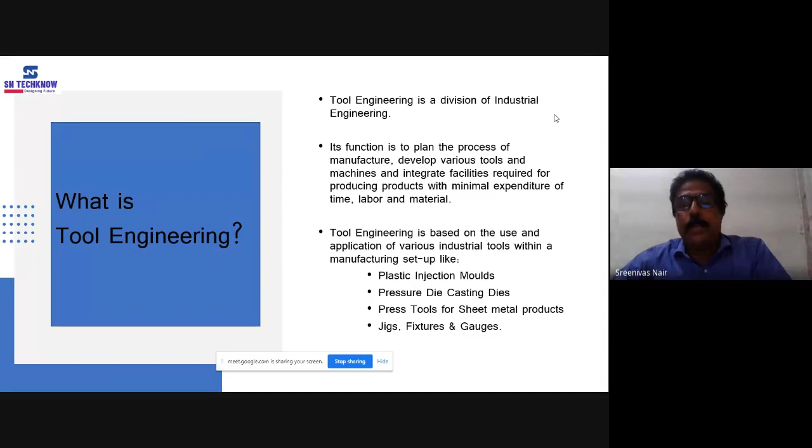Before starting the actual topic, I would like to introduce certain terminologies used in tool engineering. A few terminologies are confusing, that's why I would like to explain what is the meaning of these terminologies in the tooling field.

So first of all, what is tooling? In tool engineering field, normally it is called as the tooling field. So what is the meaning of tooling? And tool room, what is a tool room? And what is a part or component? We know that, especially the students, what is a part and component, but what is the real definition or meaning in tool engineering? And what is a tool itself? What is the meaning of a tool?

First of all, what is tooling? Tooling is nothing but the equipment required to convert raw material into a required shape. Tooling is simply the process of designing and engineering the tools used to manufacture mass production parts. A few more parts are coming, these mass production parts, we'll discuss it. So basically the tooling is an equipment required, and also the process of designing and engineering it is also called tooling.

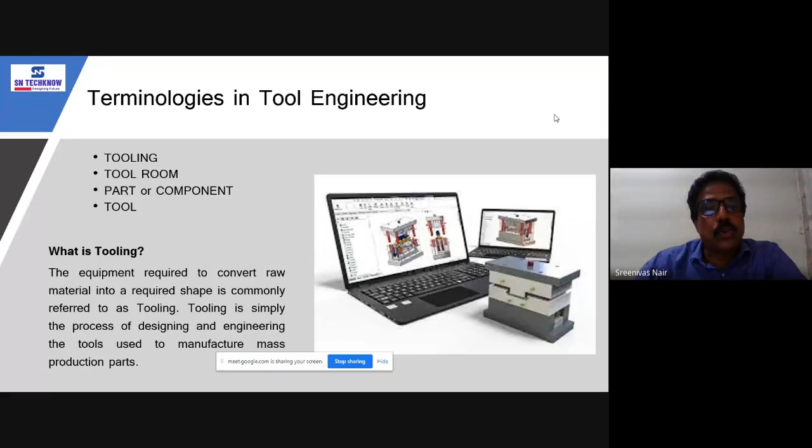So what is the tool room? If you go to tooling industries, a common word or term is tool room. So what is a tool room? Tool room is not a room, in fact, actually. It is a place or industry where new production tools are designed, manufactured, and tested. And also in the tool rooms, the old tools and running tools, that means the existing tools, are repaired and maintained.

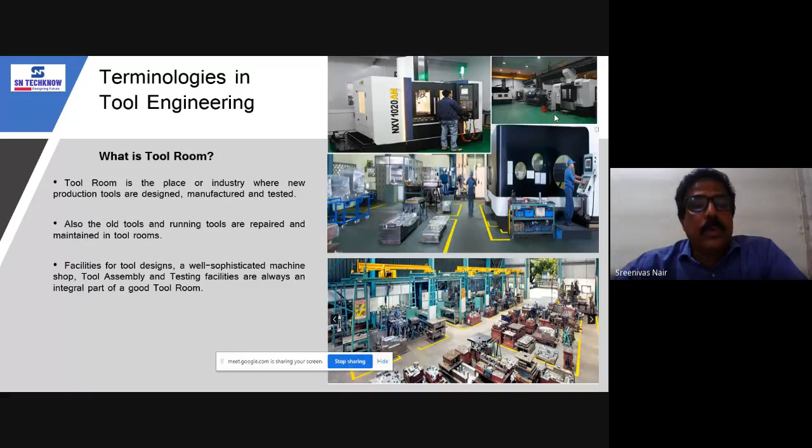What are the facilities required in a tool room? Facilities for tool designs, machine shop, tool assembly, and testing facilities are always an integral part of a good tool room.

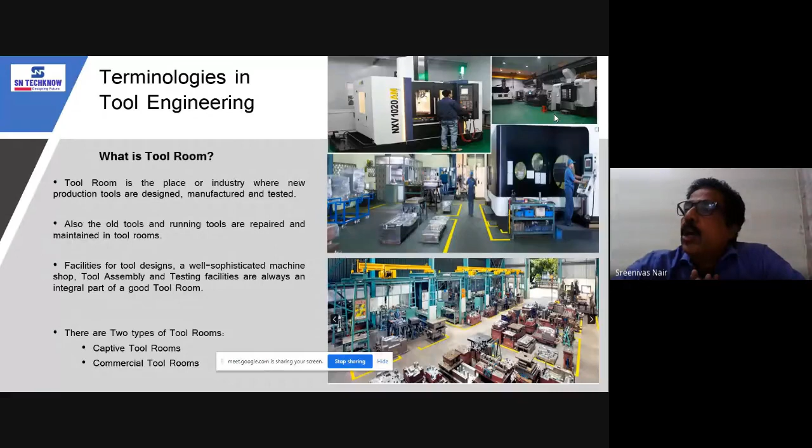Basically, there are two types of tool rooms. One is called captive tool rooms, other is called commercial tool rooms. I will explain it. Captive tool room means there is a big industry, say for example Hindustan Aeronautics Limited or Shipyard Limited. Those are big industries as such, so they will have requirements of so many toolings. So they will have one tool room attached to their own industry to cater to their own requirements. Such kind of tool rooms, which are an integral part of a big industry, are called captive tool rooms.

On the other side, the second one is the commercial tool rooms. Commercial tool rooms are the independent or separate entity which will cater to the tooling requirements of other industries.

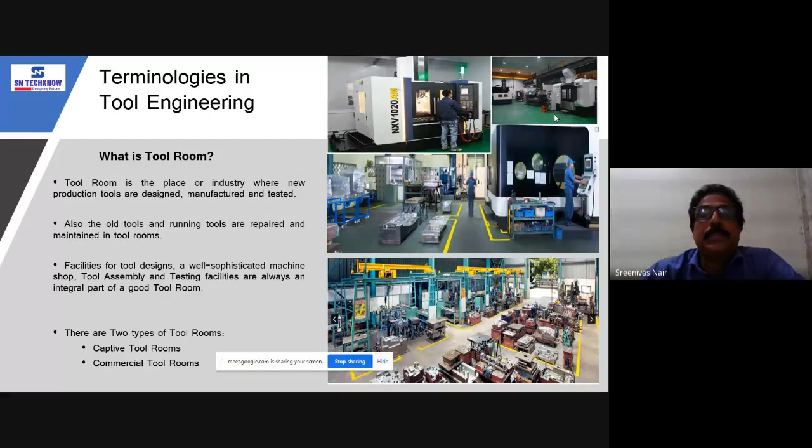Now let us come to what is a part or component. Whenever we say a part in tooling terminology, it is a mass production item, any item. So please don't confuse it with a machined part. Usually the young students especially, they will understand a part as a machined part, but the meaning of part in tooling terminology is not at all a machined part. It is a part which is going to be used in a product. A part can be a final product itself, or it could be one of the individual parts of which a final product is made up of.

Example is, let us say a mug. We all are using a mug or a plastic chair. That is a single part, but it is a final item for end use. There is no further assembly or post-molding operations required on that. So such standalone parts are called a part, actually. And also parts can be an element, individual, or final part of a final product. Like for example, let us say all of us are sitting in front of a computer, laptop.

See the laptop. How many parts? It is an assembly. So many parts are individually made and later assembled to make a final product. So many parts are there, we can see in a laptop, and those are also parts. That is the meaning of parts.

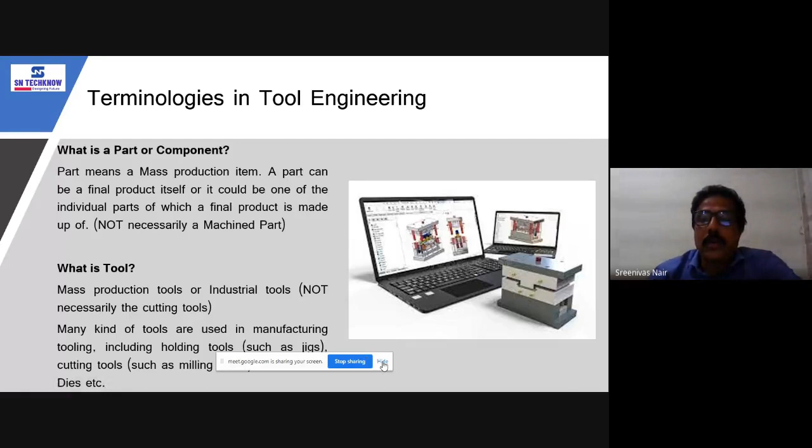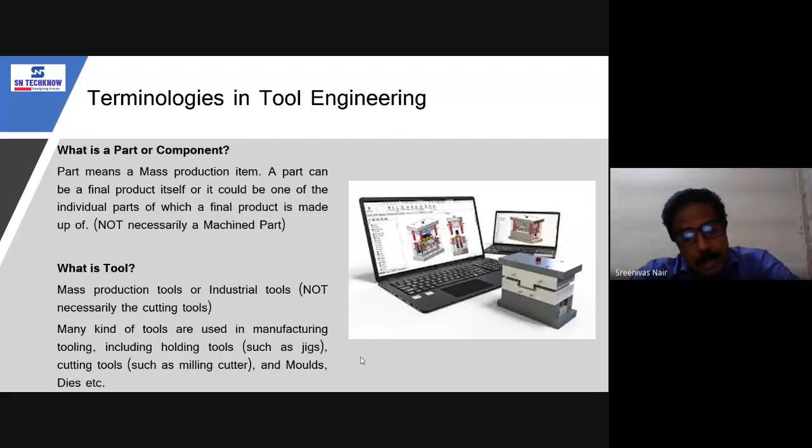So many kinds of tools are used in manufacturing tooling, including holding tools, which we call jigs or fixtures. Cutting tools such as milling cutter are also part of the tool, but that is not the only tools. And molds, dies, etc.

Now let us see how big is this tooling industry. According to a recent study by Allied Market Research, one of the global agencies, conducted very recently, the global tooling market size was evaluated at $200.8 billion, that is 14 lakh crores of Indian rupees in 2018, and is expected to reach $368.5 billion, means 26 lakh crores of rupees by 2026.

So means growing at a CAGR of 8% from 2019 to 2026. It's a very good growth every year. CAGR means compound annual growth rate.

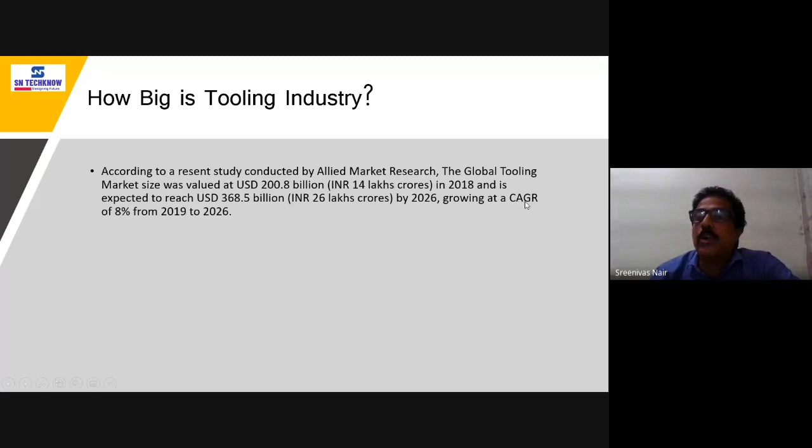And in this tooling, it includes production of molds, dies, forging tools, jigs, fixtures, and gauges, and cutting tools, also for manufacturing different components such as automotive parts, plastic components, aerospace, electrical and electronic parts, and many others.

And most importantly, every manufacturing company requires tooling to conduct the production process of parts manufactured for assembling various end products. Therefore, the tooling industry is termed as the backbone of the manufacturing industry.

This is a fact. Actually, you name any part, take any part from a laptop, a washing machine, or a refrigerator, or a household item, or our mobile set, anything. A lot of parts are made out of either plastics or sheet metals or aluminum, some other materials. Each and every part requires a tool to produce it. Without a tool, we cannot produce any part.

So here we can see I have named a very few various parts here, but none of these parts are, please notice, machined parts. These are all mass production parts. So all these mass production parts require tools, and please note, tools are unique tools.

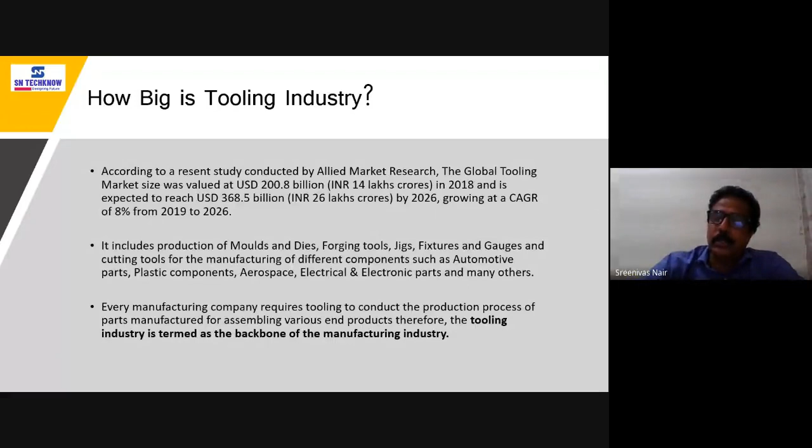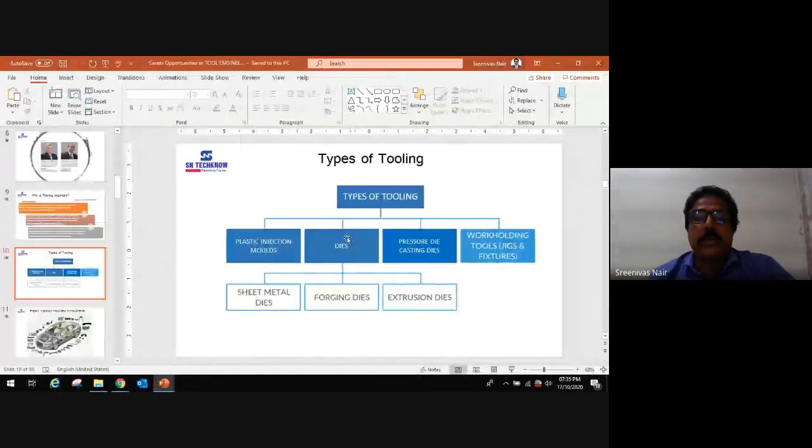So before that, I would like to show you one slide here, a video here.

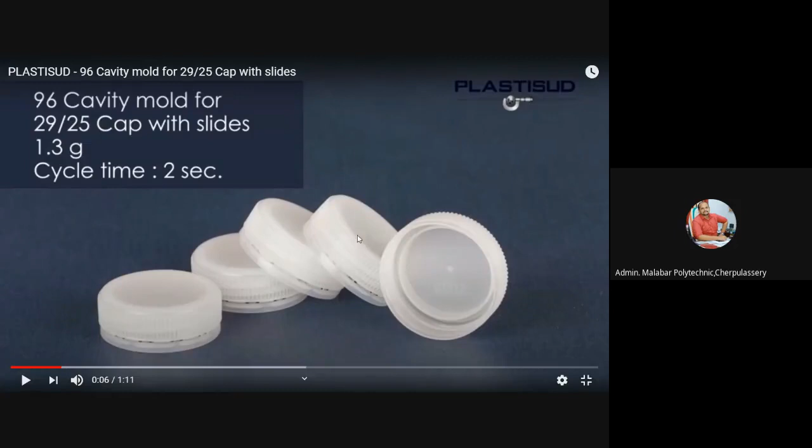Can you see this? Is it visible? Yes, sir. So this is a water bottle cap. All of you are familiar with this product.

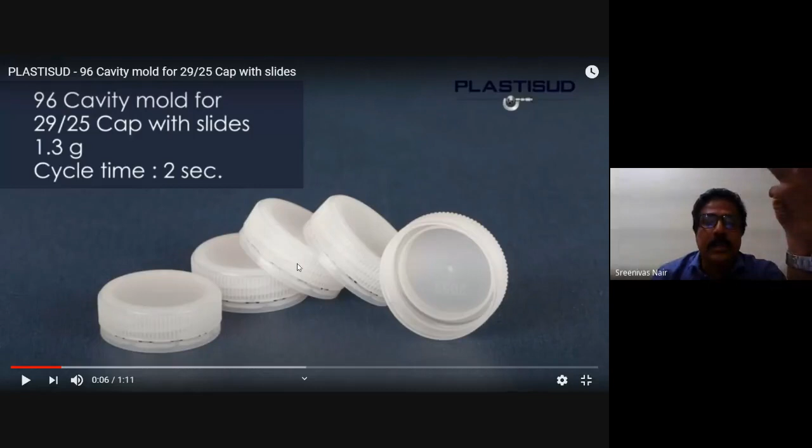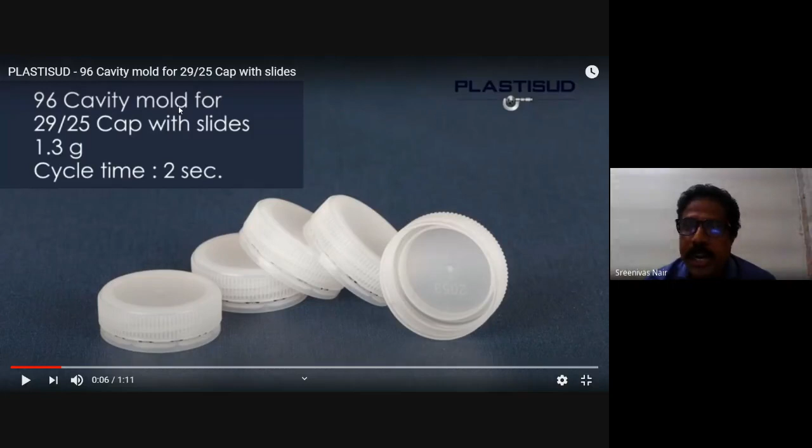You will see that in the video. So that is what is called a 96 cavity. Cavity means number of impressions. This is the cap size. This is the neck size of the cap, 29 by 25 cap with slides. The product weight is 1.3 grams and cycle time is 2 seconds.

Cycle time here means, I will explain it after seeing the video, then you can catch it very fast.

So here this product also, you notice that this is plastic, but here at the bottom of the side, you are seeing a separate ring. And in between the top body and the bottom side, there is a gap visible. Have you noticed it, all of you?

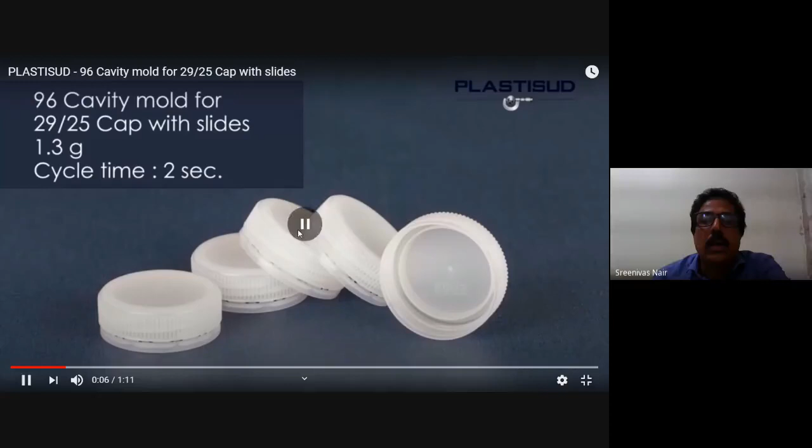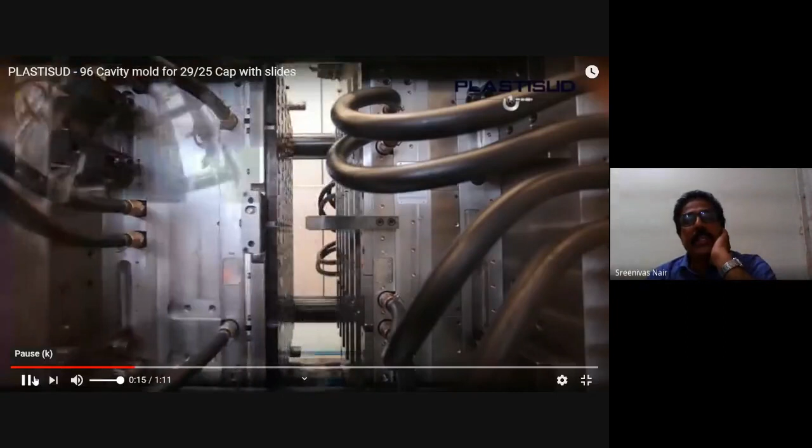See, the mold is running. Every 2 seconds, you see how many numbers, 96 numbers of caps are falling down. You just see.

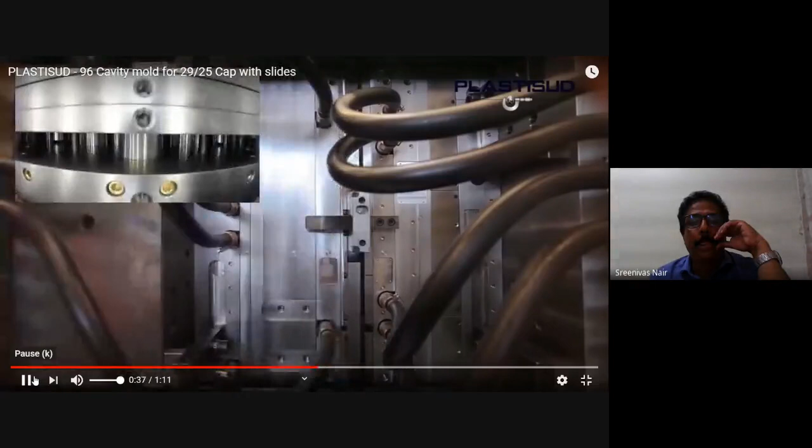See the cavity layout here inside that. So the left side of it is the core side. This is called the core side. This is the cavity side. And here also some numbers you are seeing, those are the slides to create this portion.

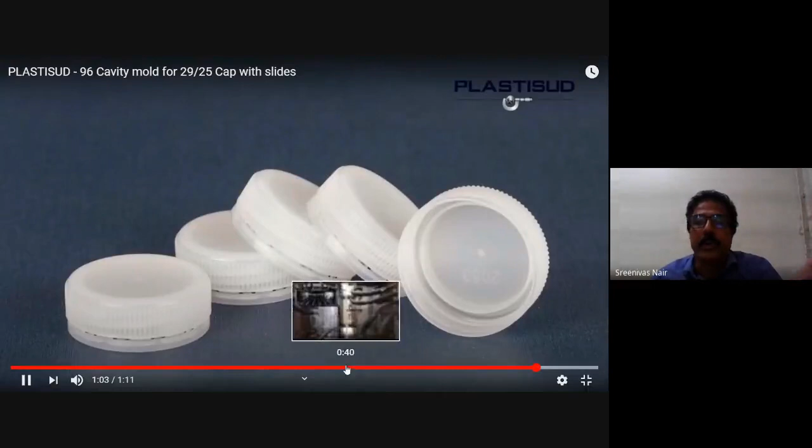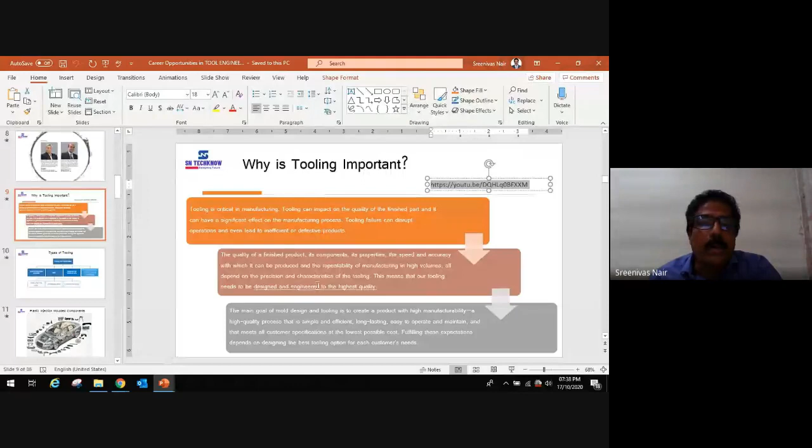Now, do you want to see once again, or can we go to the presentation? We can go for the presentation, sir.

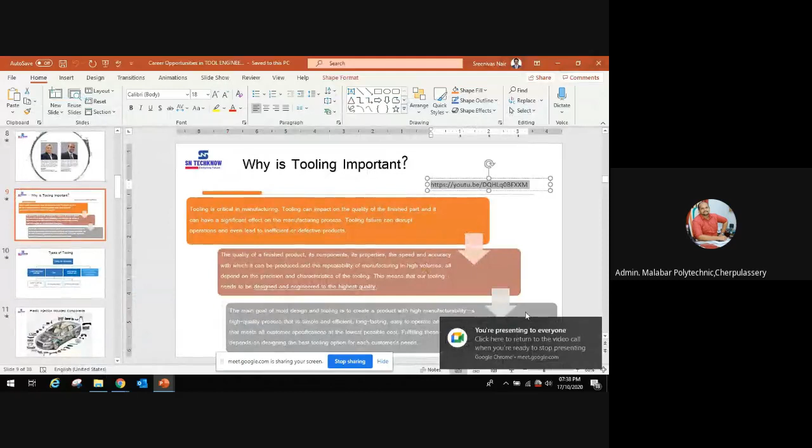So now let us check why tooling is important. Tooling can impact the quality of the finished part, and it can have a significant effect on the manufacturing process. Tooling failure can disrupt operations and even lead to inefficient or defective products. Also, the quality of finished products, its components, its properties, the speed and accuracy with which it can be produced, and the repeatability of manufacturing in high volumes all depend on the precision and characteristics of the tooling. This means our tooling needs to be designed and engineered to the highest quality.

So now let us check why this tooling is important, I will explain it. It is not there in the slide, let us imagine that. Do you have any rough idea about how much this part will cost? Any rough idea? Okay, I will tell you.

This will be around 25 to 30 paise per cap in the market. And this cap does not have any value as such. Actually, the product inside this cap, this is being used for packaging purpose, packaging of drinking water. Bottle is there, water is filled in that, then cap is closed with it. As such, there is no point. Whenever we buy one bottle of water, we will drink it. Once we have completed drinking the water, we will throw it away in the dustbin. So as far as the end user is concerned, this part does not carry much value.

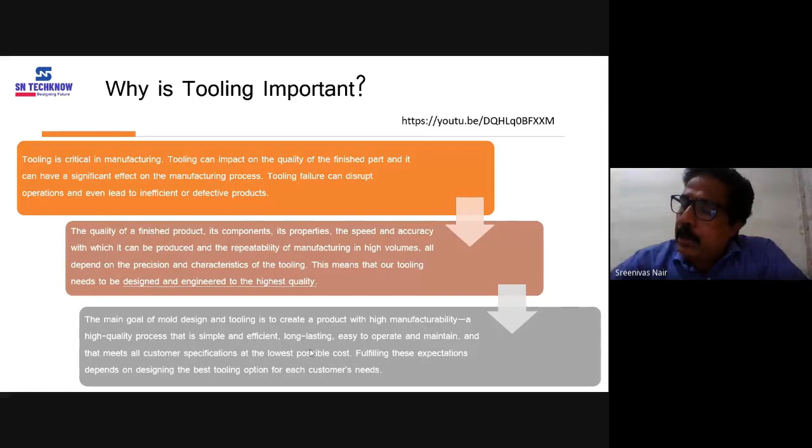But I told you that this part costs 25 to 30 paise at the most. But again, I am asking, do you know the cost of this tool? Just now we have seen the mold here under production in the video. That mold will cost not less than 1 crore rupees, Indian rupees minimum, I am saying. So now you will think, or you may wonder, that to produce a 25 or 30 paise item, I am spending 1 crore rupees worth of tooling. How does the economy work out here?

So I would like to give you some insight on that. That is the beauty of productivity. Because of the real concept of productivity that we learned during our engineering days, this mold is a living example, a typical example for that. Because of the productivity only, irrespective of the high investment cost of this tool, this product can be sold out at a very low cost.

So here, to produce this part, we all know there are essentially 4 things required. What are those parts? One is plastic raw material, it is required, without which nothing can be made, that is the basic raw material. Then one tool is required, which is called a mold. Then the conversion cost is required, conversion means the process, which I will explain at a later stage. That means one injection molding machine is also required. The machine was also there in that video. The mold has to be loaded onto the machine, and the plastic material has to be loaded into the machine in granule form.

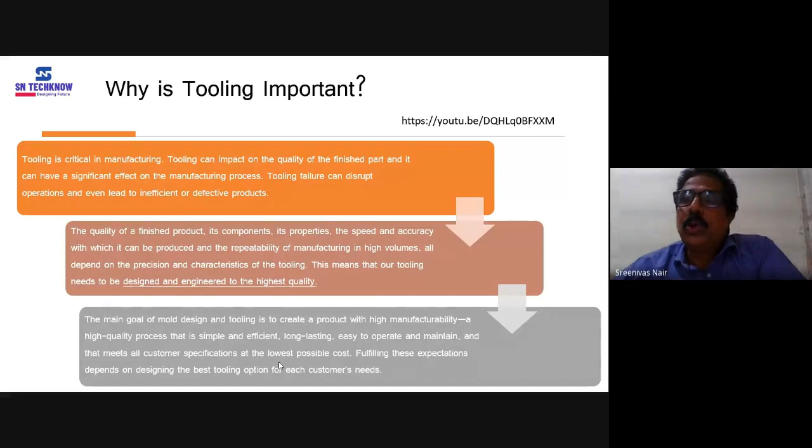Even though the tool cost is 1 crore rupees, because of the high production and productivity, finally the tool cost involved in the final part cost is negligible. That is why, when dealing with so much disposable plastic items, this is how those plastic items become disposable, like a bottle cap.

In other words, in order to make a product disposable, we have to build up a tool in a most productive and efficient way.

Are all of you getting my point? Hello? Yes, sir, please continue. Are you getting the point? Understood the concept? Yes, sir. Yeah, yes, sir.

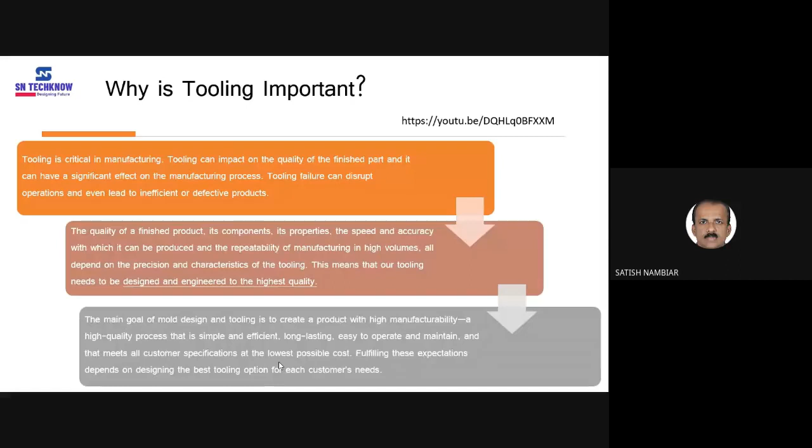So this is how - because I am explaining why this tooling is important. In this video, we have seen that the tool is designed in such a way that it is highly productive and gives consistent quality products without any rejections, with the least possible time and trouble-free functioning. That is the reason that product becomes very cheap.

So now I hope you might have understood the importance of tooling. To make this tooling, to engineer such a tooling, is not an easy task. A lot of effort, engineering concepts, and applications are required to produce such a tooling.

Yes, sir. So the main goal of mold design and tooling is to create a product with high manufacturability - a high quality process that is simple and efficient, long lasting, easy to operate and maintain, and that meets all customer specifications at the lowest possible cost. This is the ultimate goal of designing and engineering any tool and tooling, and fulfilling these expectations depends on designing the best tooling option for each customer's and product's needs.

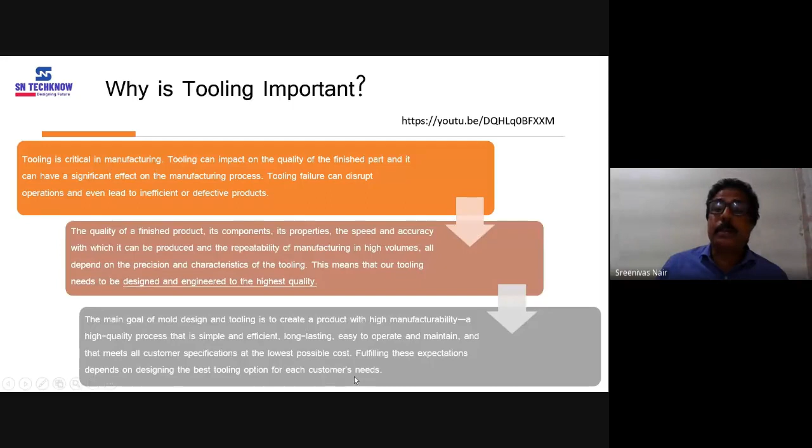Now let us see what are all the types of tooling. There are different types of toolings. We have seen plastic injection molds, used for plastic parts, and dies. There are 3 types of dies: sheet metal dies, forging dies, and extrusion dies, and pressure die casting dies. These are used for aluminum parts, aluminum alloys, zinc alloys, and magnesium alloys. And work holding tools, jigs, fixtures, and gauges also come under toolings.

Now let us see a few examples of plastic injection mold. I don't want to give you examples about plastic items in day-to-day life since we see so many, but I am giving you examples in an automotive or car. Within a car, what are all the items made out of plastics? And again, for each and every item, making each part requires a unique tool.

If you see the front bumper, the grills are plastic, and the headlights are in plastics, and the wheel caps are in plastics. The rear lightings, the fog lightings, all the lightings are in plastics, and the rear bumper is there too, and the rear view mirrors - these are all the exterior parts. Inside the car also, there are a lot of plastic items we can observe. So these all require toolings.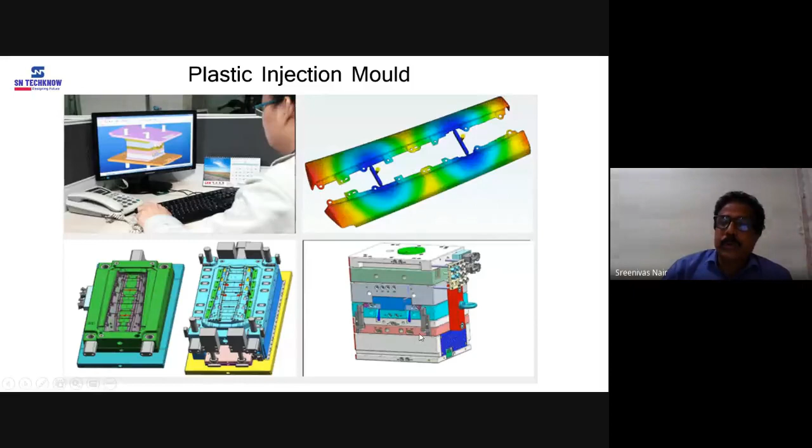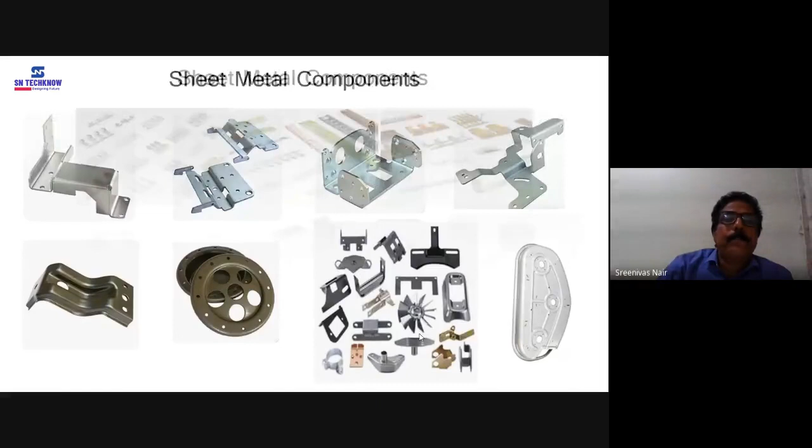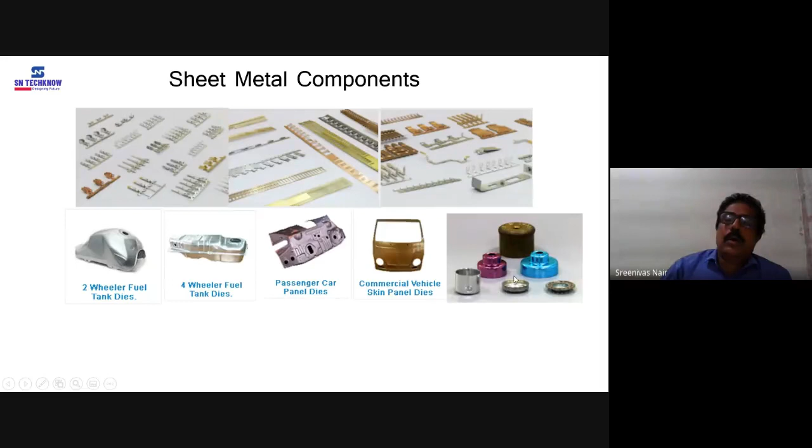These are all examples of sheet metal components. These are connectors inside our phone and electrical gadgets and even automotives also. So many kinds of connectors we are using, very small, tiny parts, but the requirements are in millions. So those parts are also made by using press tools. Automotive skins and panels, fuel tanks, and some kind of caps - these all are made with the help of press tools from sheet metals.

This is the image of a press tool. This is a progressive tool. I will explain what is a progressive tool. Here we can see that this is the bottom half of the tool and this is the top half of the tool. Here, this brass color, this is the component.

This is progressive because we will feed a sheet into the tool and it will pass one by one stage. There are so many stations inside the tool and it will pass to each station. The progressive press tools are classified in terms of their number of stations - 30 station, 32 station, 60 stations. So that means after passing through the stations, say 60 stations, it will produce the final part. The final part is shaped in a progressive manner, stage by stage, station by station.

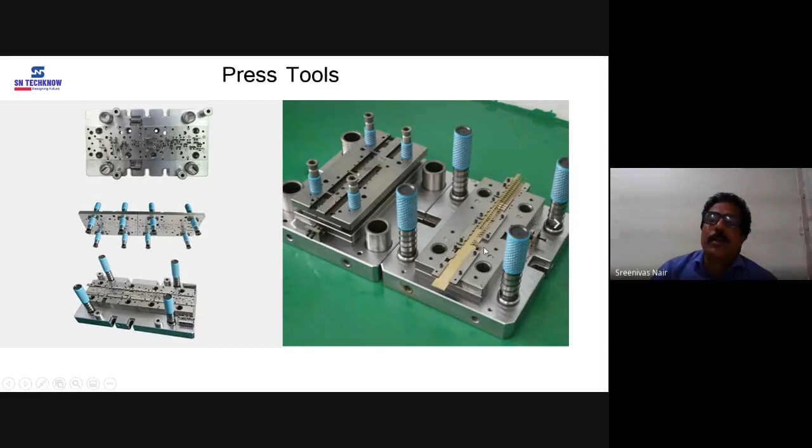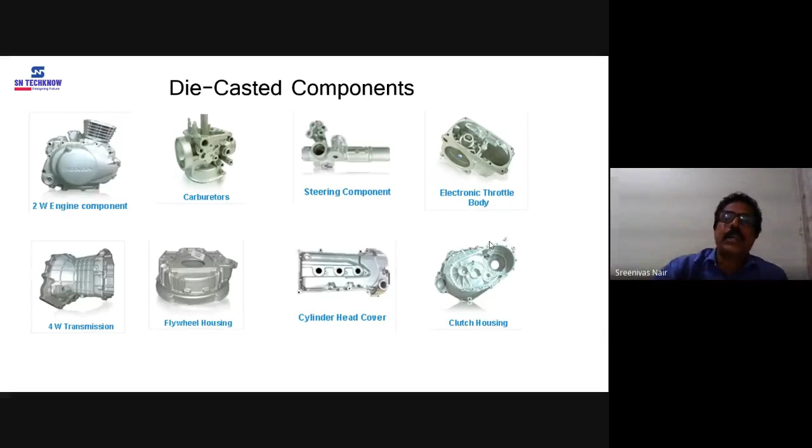So these are all examples of die-casted components. Die-casted components basically use 3 different materials - one is aluminum-based alloys, second is zinc-based alloys, and third is brass is also used, and magnesium also. There are 4 different types of materials we are using here for pressure die casting dies. This is a pressure die casting die, more or less similar to an injection mold.

So now what I am planning is that one particular process we'll see in detail. I am selecting injection molding process because everyone here knows plastic. So here, rather than reading this, I think one more video I will show you.

Sir, the presentation is not visible. Sreenivas sir. I think he got disconnected. Yeah, maybe.

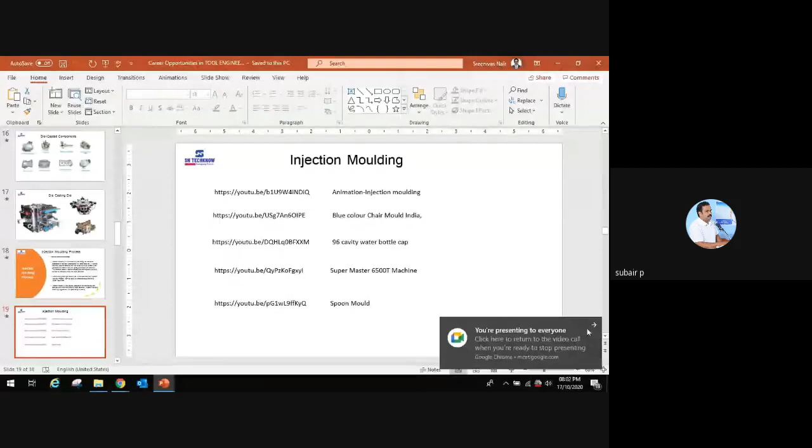So is my screen visible now? No, sir. No, sir. What about now? It's okay, sir, it is coming, it's okay. So I will start with that video now.

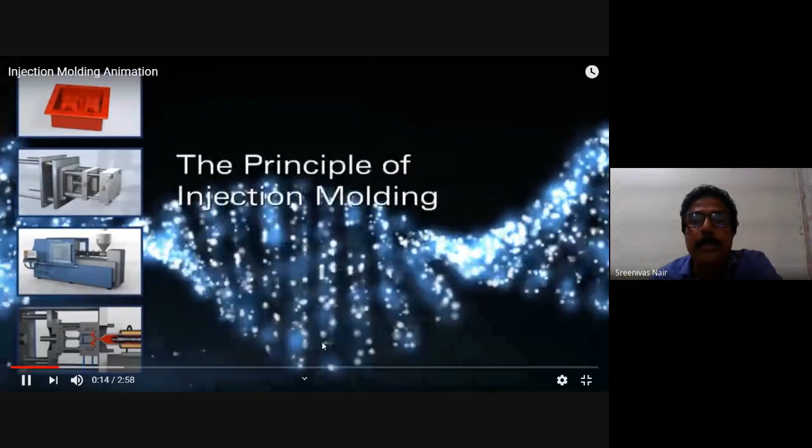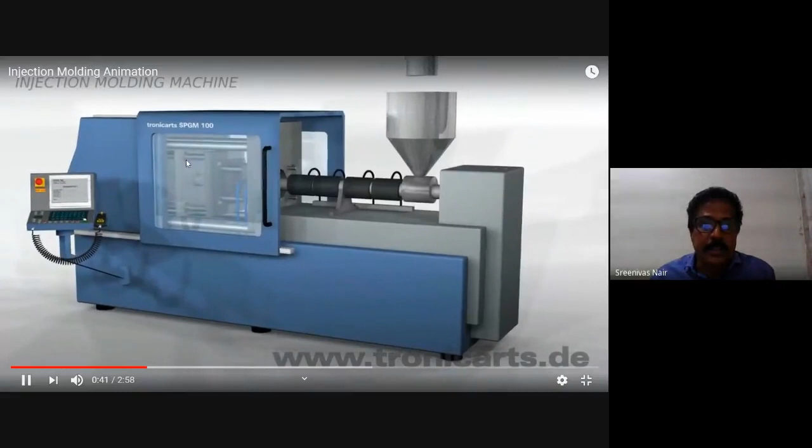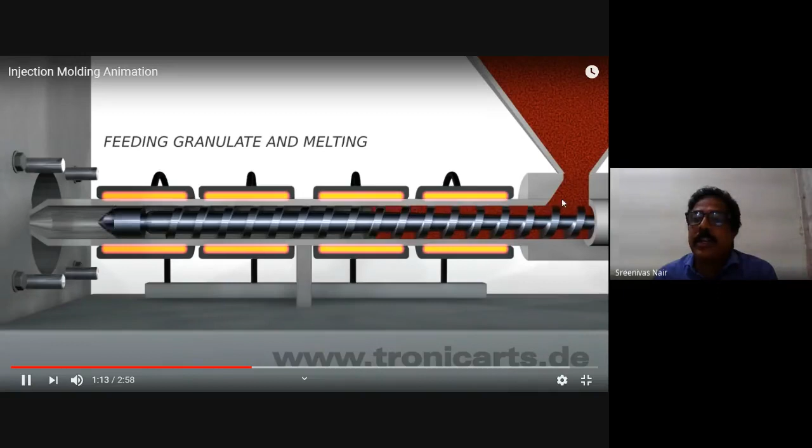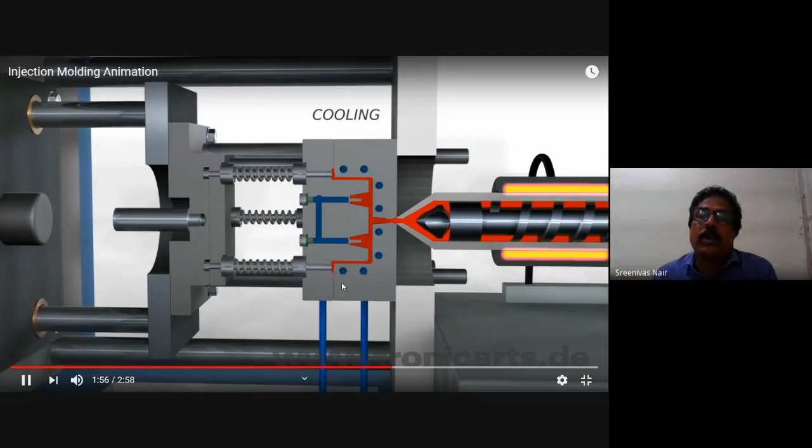So what we are seeing in this video is the principle of injection molding. This is the plastic pot we are going to make. This is the mold - this is the cavity side and this is the core side of the mold. This is the complete machine. Here the mold is loaded, this part is called the clamping side, and this is the injection side of the machine. In injection, there is a hopper, and inside the hopper we feed the material. This is called the barrel - screw and barrel - with heaters on the periphery. This is the screw which will plasticize the solid plastic material to liquid with the help of band heaters. Once the screw rotates, the plastic material will heat and plasticize, and the screw will advance and inject it inside the mold. Now this is the injection phase - the machine injects the plastic material into the mold cavity. Now this is the cooling phase - these are the cooling lines, water is circulated. The mold is opened, the part is ejected, and this cycle repeats. This is injection, and now the cooling is happening, and the plastic part got solidified. Mold opened, part ejected - this is one cycle.

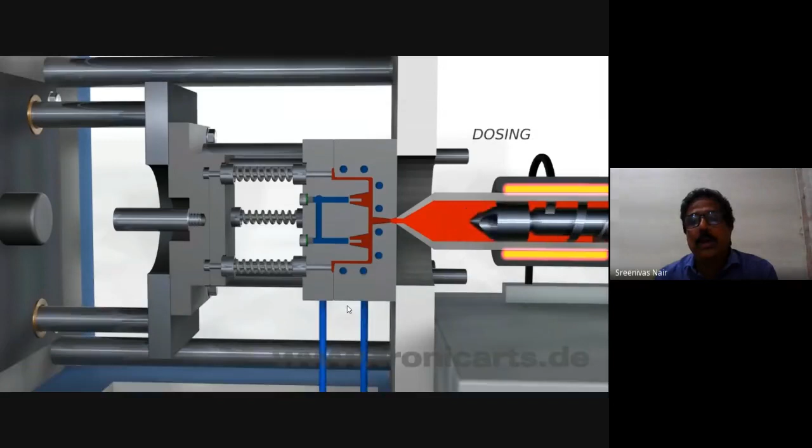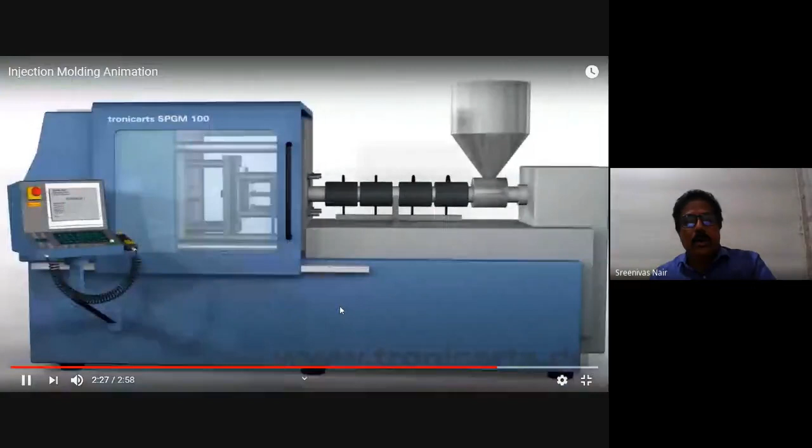Is the process clear to you? Clear for all of you? Yes, sir, okay.

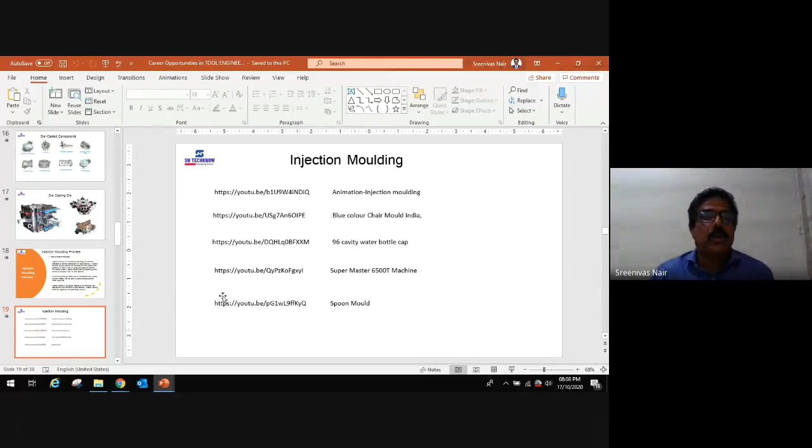So now let us go to this slide. What is the injection molding process? Injection molding is a manufacturing technology for the mass production of identical plastic parts with good tolerance. In injection molding, polymer granules are first melted and then injected under pressure into a mold where the liquid plastic cools and solidifies. The material used in injection molding are thermoplastic polymers that can be colored or filled with other additives. So this is the process.

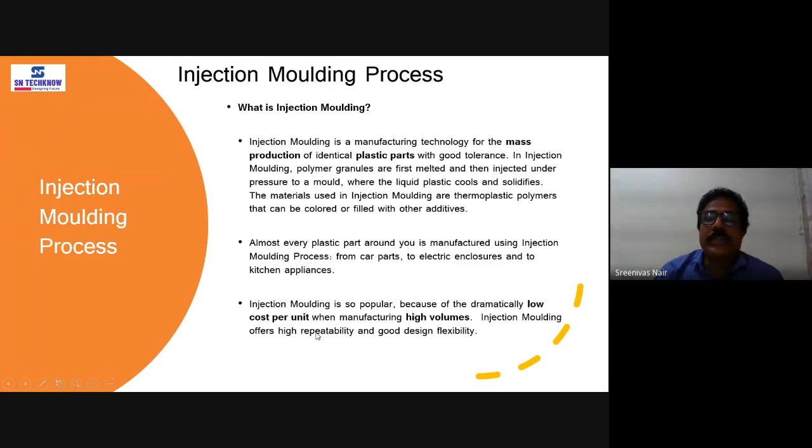Almost every plastic part around you is manufactured using the injection molding process - from car parts to electric enclosures to kitchen appliances, everything. Whatever part you name, those are all made out of injection molding. Injection molding is so popular because of the dramatically low cost per unit when manufacturing high volumes, as I explained earlier. And injection molding offers high repeatability and good design flexibility. So is there any doubt so far?

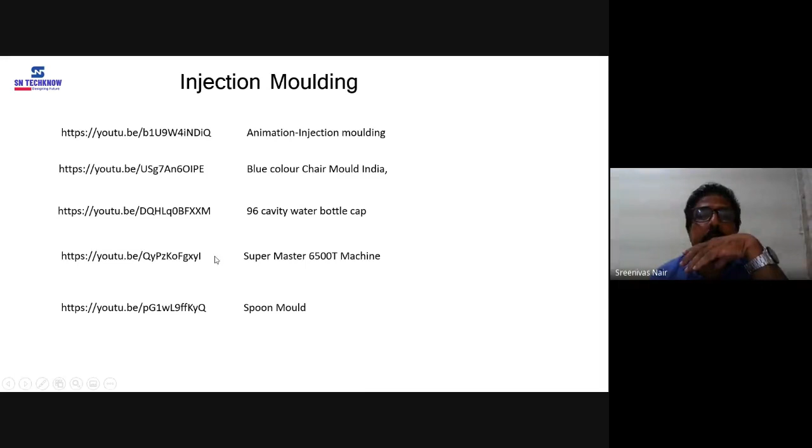Okay, interactive. So now we'll see some more molding process. I'll tell you, we have seen animation. Now we will see a spoon mold. How a spoon...

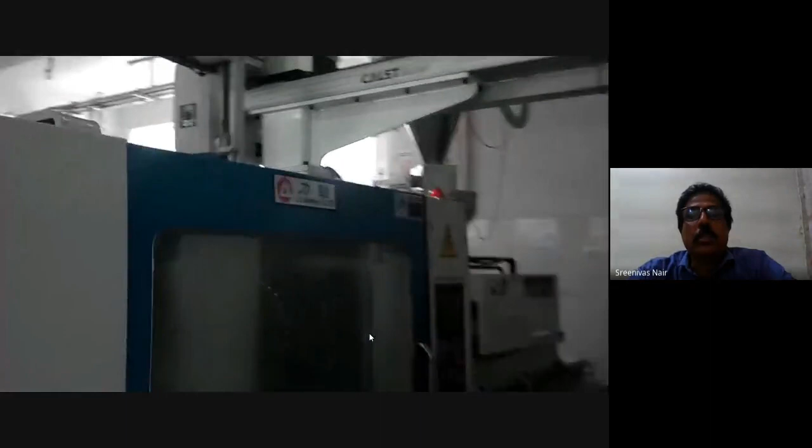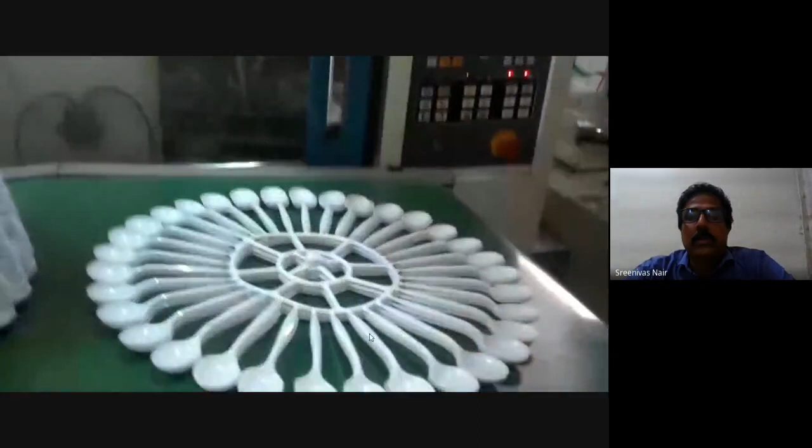So you can see here how many spoons are made. I think it is a 36 cavity tool. The cycle time here is less than 10 seconds.

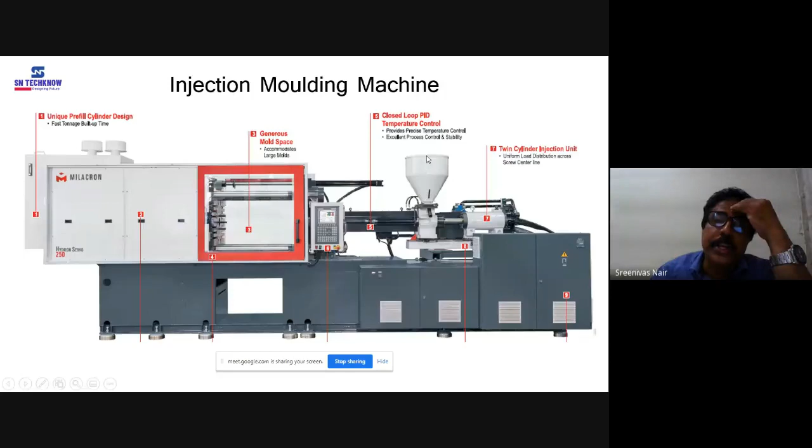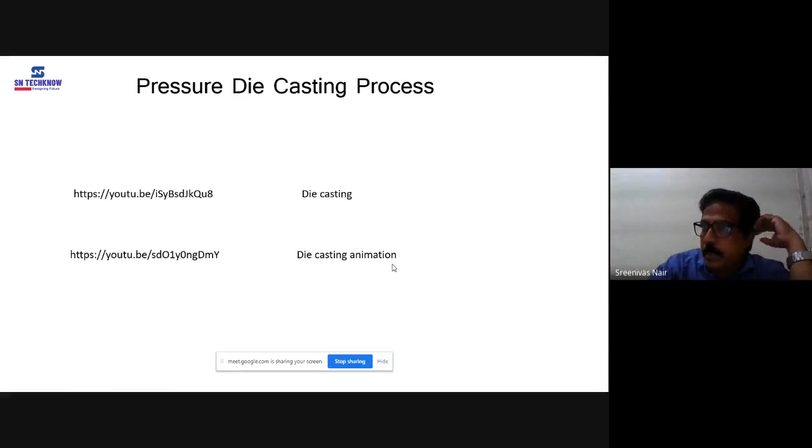Sir, we can take 10 more minutes, I think. Okay, now then we will go to part 2 directly.

So yes, I have some more videos, but we will skip it and go to part 2, that means career opportunities in tool engineering.

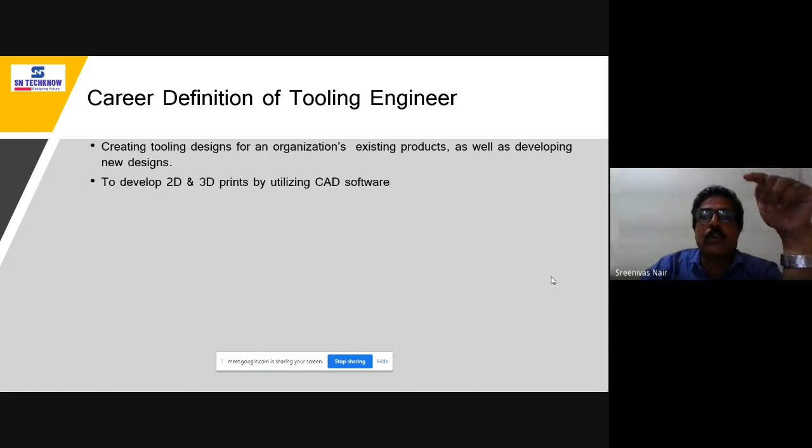Collaborating with manufacturing and design personnel in development teams.

Evaluating and validating products after design changes. Technical assistance to quality assurance or manufacturing personnel.

Collaboration with marketing, product development, and manufacturing departments to provide product recommendations. Create purchase requisitions, customer quotations on project cost and lead times.

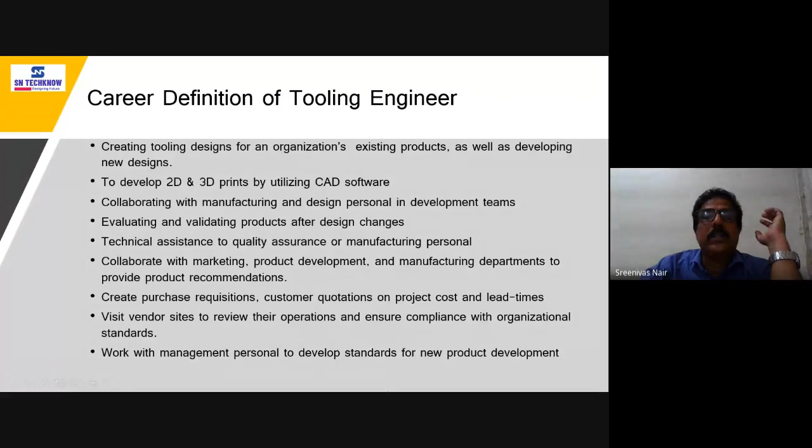Visit vendor sites to review their operations and ensure compliance with organizational standards, and work with the management team to develop standards for new product development. These are the things a tool engineer does within the industry.

Now next is requirements to become a tooling engineer. What is needed - basic qualification: BE or diploma in mechanical, automobile or production; and essential qualification: postgraduate or post diploma in tool design. So I would like to explain this point.

With a plain BE or diploma certification, it is very impossible to attain a job as a tool engineer. The reason is that it is a very much specialized field, so the knowledge pertaining to that particular domain has to be there.

So for that, those who are wishing to enter into this field have to at least do a post-diploma level program or a postgraduate diploma level program - one year courses. Many institutes are doing these programs, and they can undergo one year of training and enter into this field.

Other qualities a tooling engineer should have: the ability to work independently and to collaborate with other team members, practical experience using CAD and AutoCAD software, analytical and problem solving and technical skills, good eye for detail, leadership skills, and ability to complete projects on time and to specification and budget.

And now, advantages of the tooling field. Better employability - there are a lot of opportunities available in the market, and I would like to say that this is one field where there is a huge gap between demand and supply. Demand for trained manpower is too much, but the supply, the trained manpower available in the market, is very less.

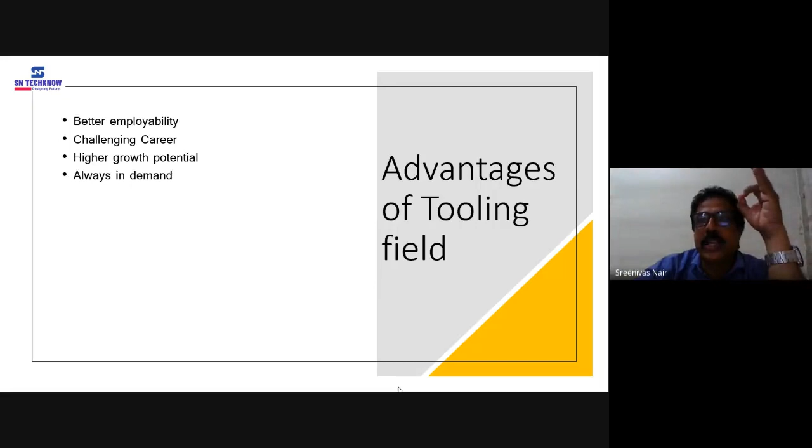Higher growth potential, always in demand. Even today in these pandemic situations, job losses are a common scenario here in Pune, but we cannot find even one single tool engineer who is jobless here, even in today's scenario. So that is the demand.

And global demand - this demand is not limited to our Indian markets, it is on a global level. Good opportunities exist in Europe, Australia, Canada, Singapore, Malaysia, Thailand, Mexico - these are all countries having too much job and employment opportunities for tool engineers.

It's a recession-proof profession, I have already explained. Demand increases with increase in experience and knowledge, not like IT engineers. IT engineers, when new technologies come, become outdated and are out of the industry. Here that is not the case. In tooling, as the experience and knowledge increases, the acceptability and demand in the industry increases proportionately.

And it has vast and versatile application. We have already seen the application of the toolings - the application of plastic parts and sheet metal items are in every area, so the opportunity is also very vast. And be your own boss - that means one can start their own business also.

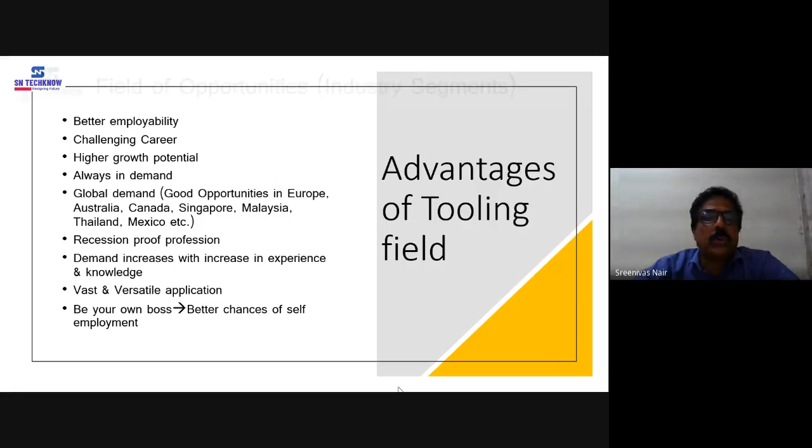What are the industry segments and fields where a tooling engineer can find a job? In automotive industries, aerospace, military, defense, electrical and electronics, medical and medical devices, packaging, communication, FMCG manufacturing, appliances manufacturing, and many more.

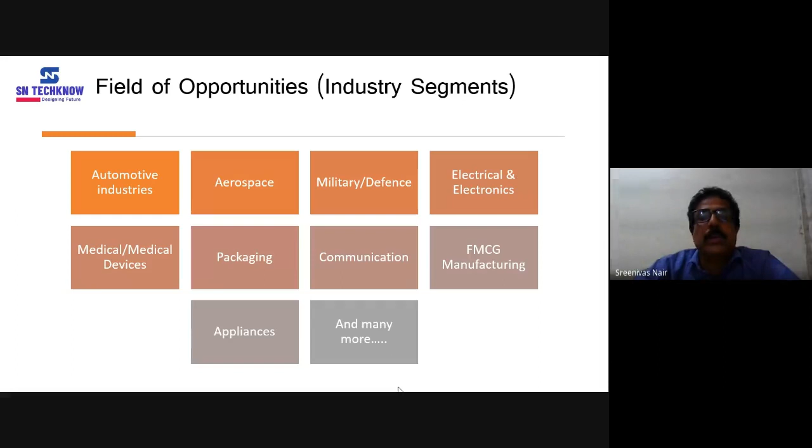Job classifications - a fresh tool engineer can join as or apply for this designation: tool design engineer, product design engineer, process design engineer, production engineer, quality assurance engineer, tool room engineer, project engineer, manufacturing engineer, maintenance engineer, PPC engineer, marketing engineer, sales engineer, purchase, training. So these are all areas a tool engineer can apply for.